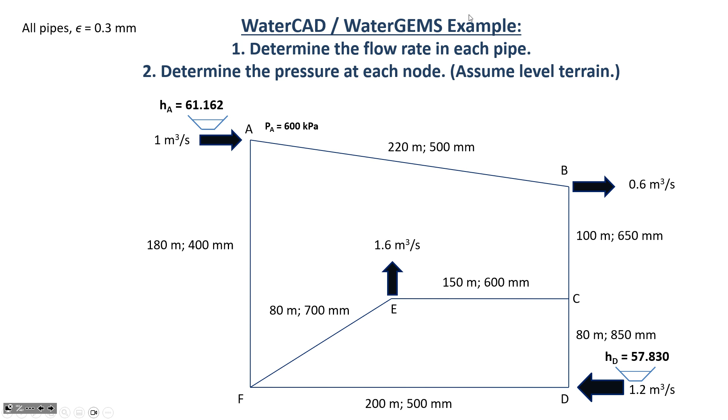So I just wanted to point that out. Okay, so what we're going to do is, first of all, you have to have CONNECTION Client running in order to get the program to work. And so this is just an annoying little license activation tool that resides down here in the system tray. And I'm going to make sure that I'm logged in. See, IW, that's me. So I'm logged in.

And with that connected, now I can just... WaterGEMS is the one that I want. And it's going to feel familiar to you if you've used any kind of CAD program. You know, it's drawing lines. We're not using any of the integration for AutoCAD or MicroStation. We're just going to do the standalone version of WaterGEMS. It's simpler. We don't need the extra functionality of integrating.

So create a new hydraulic model. So it's this one in the middle. Create new hydraulic model. It'll take a moment to initialize. If it's your first time using the program, it's probably going to default into British gravitational units. So what we'll have to do is switch it into SI and then restart the program. So go here to Tools. So we're on the Tools menu option. It brings up an option-specific ribbon, and then under More, select Options.

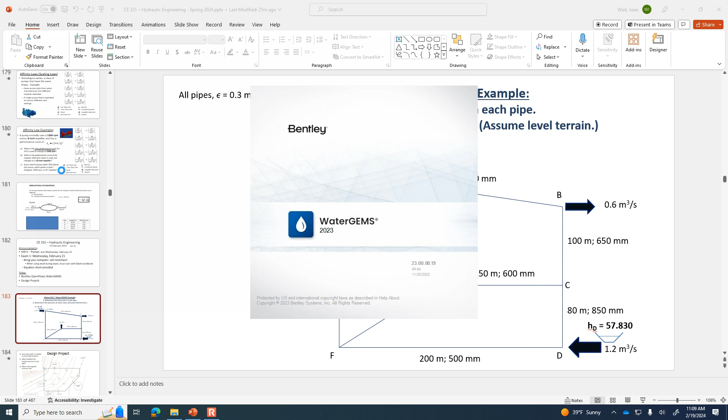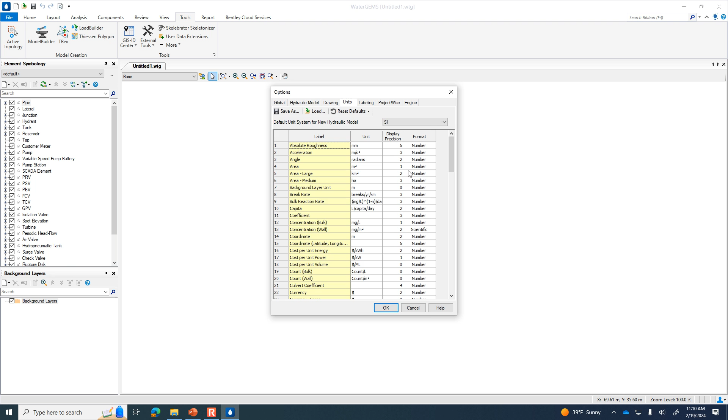But when we restart it next time, it will remember that in the previous example we had SI. And the reason why you have to restart is even if you set SI units, about half the time it won't remember that. I don't know why. It just kind of is a little bit laggard in switching over the units. And so we start from scratch, and we're going to verify that this time it's in SI. So if we go to Tools, More, Options, Units, SI. Okay, so we're good there. So here on your handout, put switch options to SI and check.

Do you have to restart it for SI units? No, it's not like you're going to have to restart every time. It's just that way every time you get back on there, it'll have the SI units now. Yeah, check if it's got the SI, and if it does, you're golden. If it's there from the beginning, we don't have to restart another time.

All right, so the next kind of preliminary thing before anything else is let's tell the program we want maximum accuracy, and that means Darcy-Weisbach. Because for whatever reason, I don't understand it, they have the model set to Hazen-Williams. We know that Darcy-Weisbach's more accurate, and I don't care if it takes the computer 9/10 of a second instead of 4/10 of a second to calculate the flow rates.

So I'm going to go under Home, Options, Base Calculation Options under the Steady State Solver. So just double click on this first place where it says Base Calculation Options. And then see where it says Friction Method Hazen-Williams? Let's change that to Darcy-Weisbach for maximum accuracy. Okay, we close it, double check if it's there. Yep, Darcy-Weisbach. Okay, so the preliminaries are out of the way. We've got the SI units and the maximum accuracy friction method. So we can begin drawing.

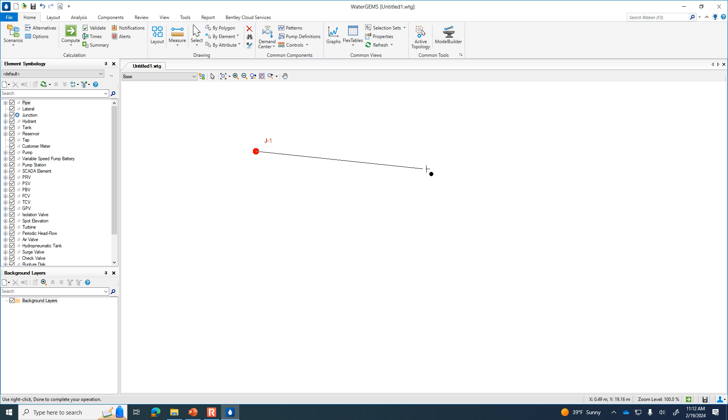So I'm going to click, that's pipe junction A. Right now it's calling it J1. I'll go in and rename it later. Here is B, C, D, F, E.

I'm going to connect back to this one, which is junction C, and I've got to click right on it because I don't want to draw another junction. I want to snap to the existing one that's there. Okay, now I need to press escape to cancel this next pipe that it's drawing, because my last step is to connect what it's calling J1 and J5, which I know as A and F. So escape, and then connect the two by just clicking on J5 and J1.

All right. So it doesn't matter that those lines aren't perfectly vertical and whatnot, because this is a top view, and the orientation of the pipe doesn't change the hydraulics. It's just a matter of the length, the flow rate, the friction type, and so on.

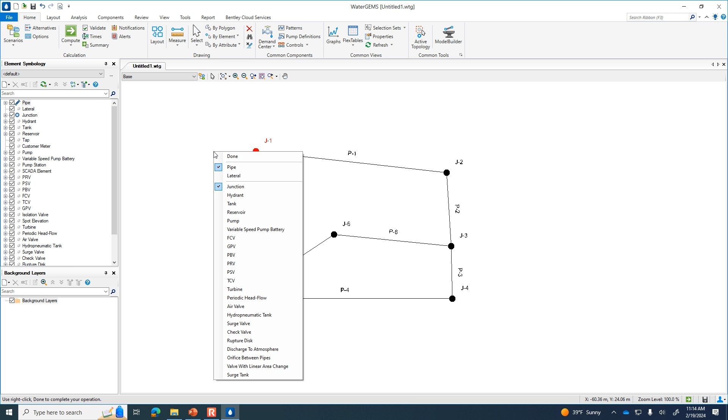Okay, now I want to put in those two reservoirs. So if you right-click on your mouse, see, this is the list of options, and right now we're on junction. Switch to reservoir. So you right-click to get that menu up, then left-click on reservoir, and then just drop a reservoir close to J1. Okay, so that's calling it reservoir 1. Now look, my cursor is a reservoir, so I need to switch it back to junction again. Junction, and then tie it into J1.

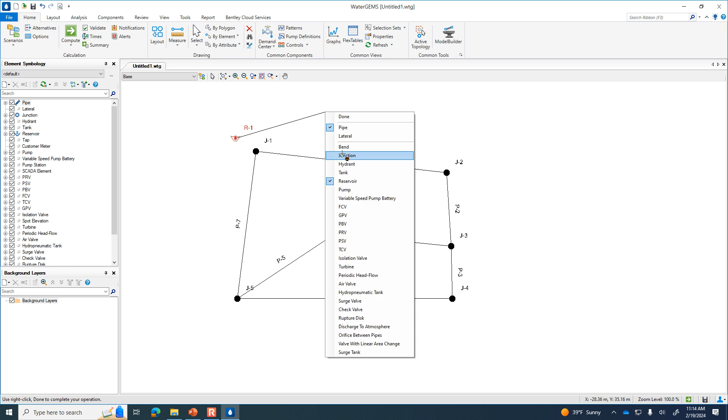So let me show that same process again over here at D, at what it's calling J4. So right-click to get the reservoir, drop a reservoir in the proximity of junction D, and then right-click again to get it back to junction, and connect the dots.

Okay, so now I have a model. I've got the schematic of our system. I haven't yet told it the diameters or lengths. I haven't yet told it the elevation of the junctions or the elevation of the water. All of those things I'm going to define. So any questions so far? Does anybody need to see a certain thing?

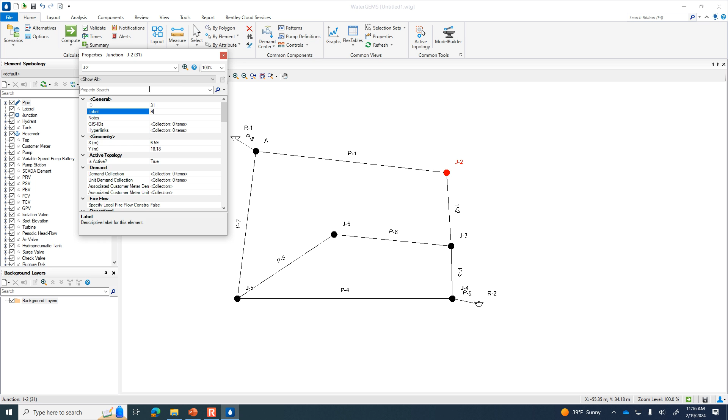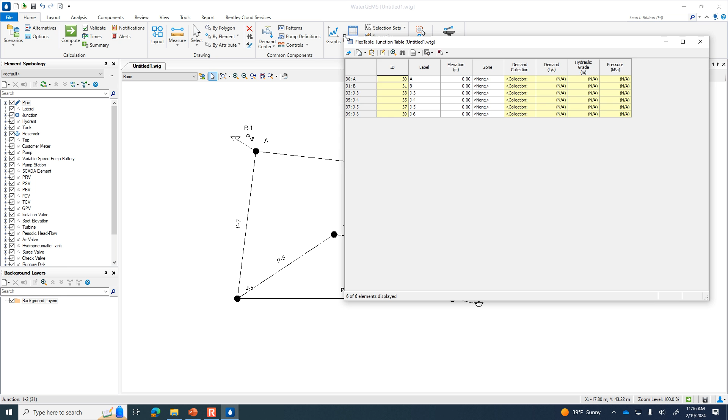So a better way to do it is to open the flex tables. Here on the home menu, in the ribbon across the top, one of the options is flex tables. Click on the little arrow beneath flex tables, and we're going to open up the junction flex table. When the junction flex table is visible, we can just go through one at a time without having to open a menu for each one to relabel them. So J3, that's C. J4, that's D. J5, that's F. And J6 is E.

All right. Now look what else it knows about these locations. It says elevation, zone. You're not going to do anything about zone, but elevation is the physical elevation of that junction. For our example, we assume that all of these are at the same elevation, and let's just say that's the elevation datum of 0.

In your project, I'm going to give you a map of a city, and it's got elevation contour lines. So you're going to have to actually put the physical elevation of the ground, or maybe ground minus 1 meter. It doesn't matter, but you're going to have a different elevation for every point in the network for the project. For this example, we'll leave it at 0. All right, so let's close this.

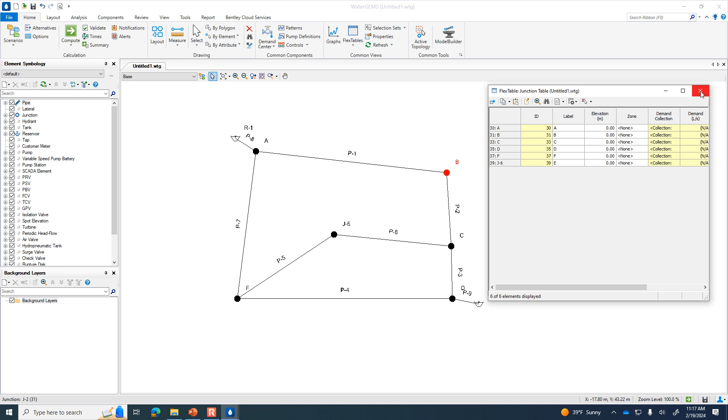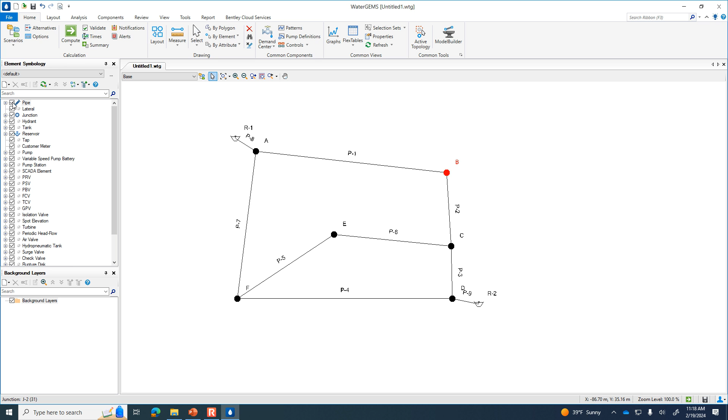We've renamed it. I don't necessarily need to see the pipe names, P1, P2, and so on. So let me point you over to the left here. These are the annotations, and see where it says pipe. Right now the pipe name annotation is selected. It's got a checkbox, but if I turn it off, oh no, those are the pipes. We need those.

Label, it's the label. So expand it, and turn off the label, because I'll just call it pipe AB. I'll name the pipe by its origin and destination junction. So you can turn off the annotations using these menus. All right.

On the subject of annotation, let's add some annotations like the diameter of the pipe and the flow rate that's going through it. Okay, so you know how I just turned off the labels? We can add more annotations. Right-click on the word pipe and then do New Annotation.

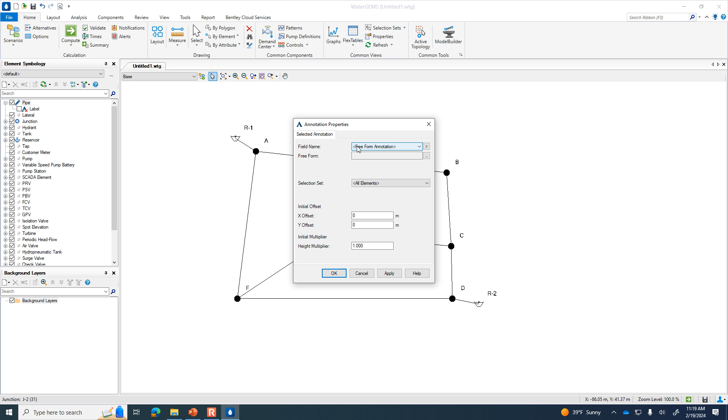And here in the drop-down box where it says Field Name, drop down to Diameter. And rather than just have the numerical diameter, like if you clicked Apply, it just shows the diameter and it's on top of the pipe. We'll fix that. I think it's better if we have a label. So under prefix, I'm going to have D space equals space, and now apply. And now it says D equals 152.4 millimeters. So that's a little bit better.

Now to get it up off of the line, I'm going to do a Y offset. So see where it says initial offset? We can manually drag each one of these annotations one at a time. But if we just want all of them to be up off the line a little bit, let me do a 2-meter offset. So I've just put 2 into the Y offset and then apply. And now they're not on top of the line, and so that looks a little bit better.

You'll notice down here there's a height multiplier. What if for some reason the labels are really small? Usually that happens when I've zoomed out a lot and started drawing my network zoomed out. Now the labels are small. You can change the size of the annotations with this height multiplier. You can make them bigger or smaller, however you like. In this case, a multiplier of 1 looks good to me. Okay. So we've annotated the diameter.

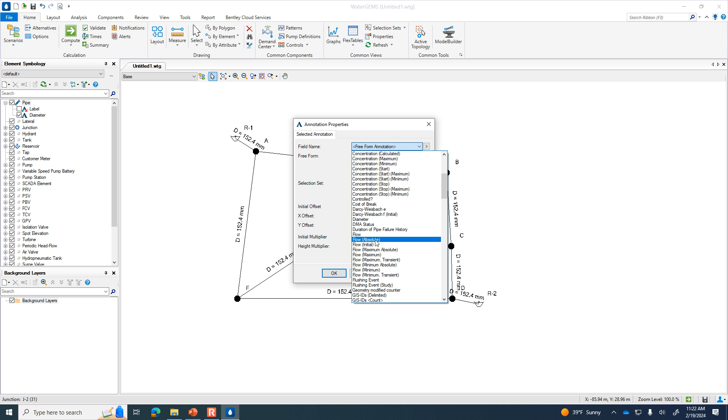So the flow rate I want to do is flow absolute. And the reason why I want flow absolute instead of flow is, you remember how clockwise is positive, counterclockwise is negative from the Hardy-Cross method that we did on Excel? It will give you negative flow rates if the water direction is counterclockwise. And it looks weird if you have negative flow rates. So we'll just annotate flow absolute. And then under the prefix, I'll do Q space equals space. And then the Y offset, I'll do -2 so that it's below the line.

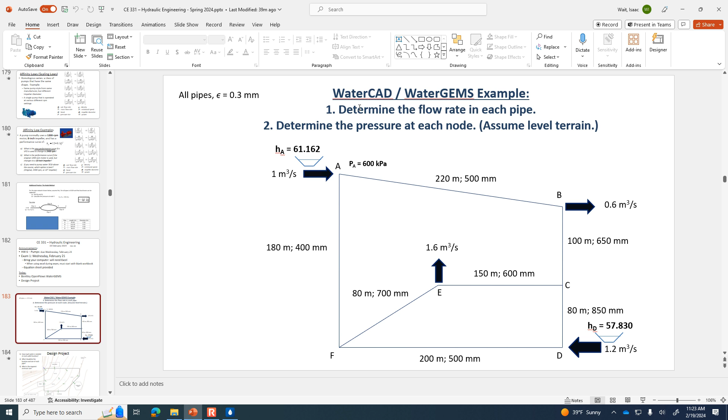And let's also annotate the pressure at the junction, because if we go back to the example, what is it asking? Flow rate in each pipe, pressure at each node. All right, so let me now right-click on the word junction, because we're going to add a junction annotation, which is the pressure. So right-click, new, annotation, scroll down on the field name, and we want pressure. And then for prefix, I'll just have P space equals space.

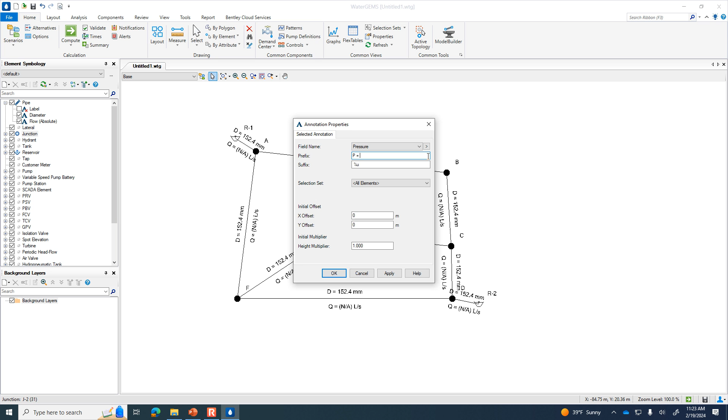And then I'm going to need an offset. And this is hard to predict in advance. Let's see what -1, -1 looks like. It's probably going to be in the way. Apply. Yeah, it's definitely in the way. Let's do -3, -3.

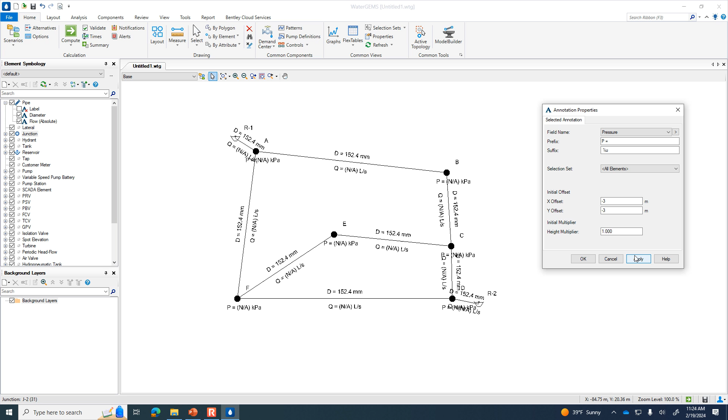That seems all right. I may go back and change some of them, drag them out of the way. For example, here at D, it's a little bit crowded. So let me click OK, and then at D, I can drag that one down a little bit, so it's not quite in the way like it was, and maybe move this one over.

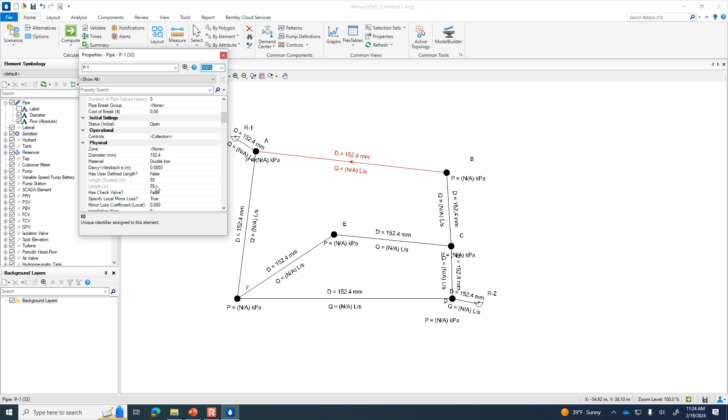So we've annotated. Now we need to put in the pipe details. Let's take pipe AB. Double click on pipe AB to bring up its properties. Right now, how long does it think that pipe is? It thinks that pipe is 55 meters. Why does it think that? It's just based on where I clicked on the screen.

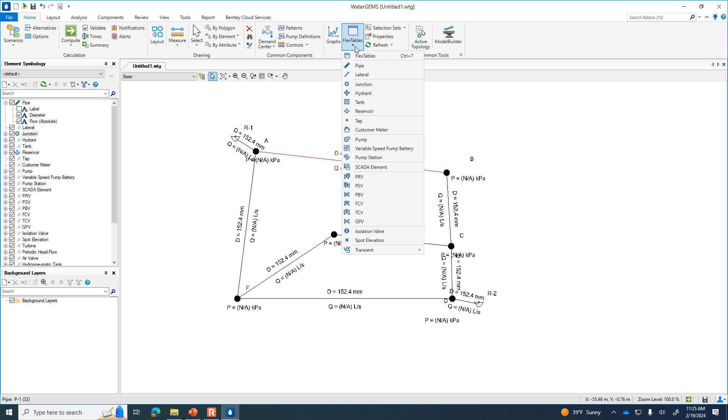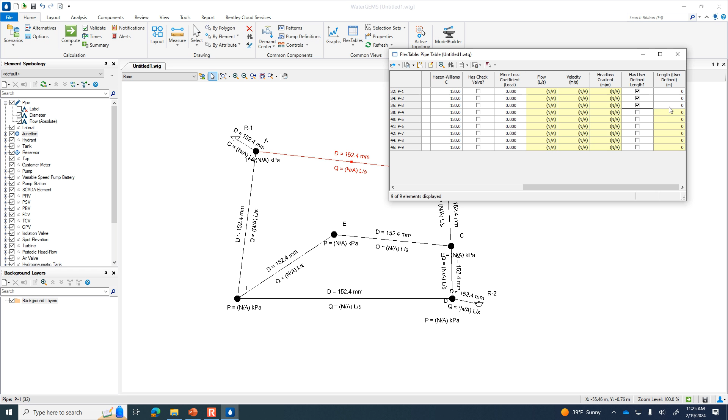How long is that pipe supposed to be in our example? 220. So there's a way for me to tell it it's a user-defined length, instead of just using where I clicked, and type that in manually. Go to the FlexTable for the pipes, scroll to the side, and one option is 'has user-defined length.' Let's click the checkbox for each of those. Notice when you click the box, it turns this last one from yellow to white. Yellow means it's a calculated, non-editable field, but white means you can directly put data in.

So when I click this, it lets me put in the lengths they're supposed to be. For this first pipe, I guess I need to rename the pipes. Under the labels, let's call the pipes based on their start and stop nodes. So P1 is AB, P2 is BC, and so on. The ones that connect to the reservoir, I'll just leave as they are.

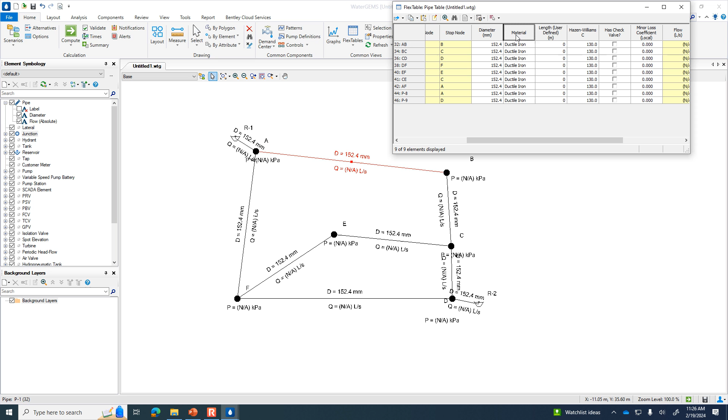Here's the diameter, and over here is the length. Let me make those two columns closer together by dragging. If you click with the left mouse cursor and drag, you can move where things appear. I want to move the length next to the diameter so I have an easier time changing both. All right, so you've got the printed handout.

Let's look at AB. It should be 220 meters and 500 millimeters in diameter. Let me put the length first and then the diameter, since that's how it's annotated on the handout. So the user-defined length for AB is 220, and the diameter is 500. BC is 100 and 650. CD is 80 and 850.

DF is 200, 500. EF is 80 and 700. CE is 150 — the length is 150, and the diameter is 600. AF, the length is 180, the diameter is 400.

For these other pipes, I want as little head loss as possible through the pipes that connect to the reservoir, for this example. In your project it's a different story, but the purpose of the reservoirs here is just to pressurize the junction. So let me make it relatively short — say 10 meters long — and give it a really large diameter, 1,000 millimeters, so there won't be any head loss through that little pipe connecting the reservoir to the network.

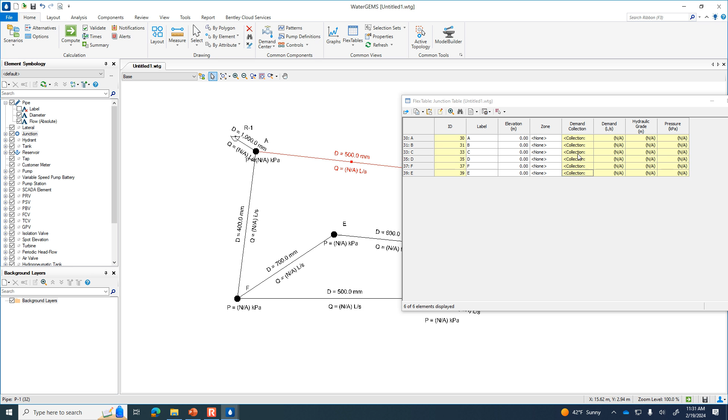Okay, so we just defined it at B, and then the other one we want to do is E. So do a demand collection, click on the ellipsis at E, and it is 1,600 liters per second at that location. All right, let me just make sure that it's got the one at B. Yeah, it's there—600 and 1,600. Okay, we are set to calculate.

Now, you'll notice it didn't tell us the pressures or flow rates yet—it hasn't done any calculations. We have to click on a compute button for it to run the model and go through the process. In the background, it's doing what we set up in the spreadsheet, same method. It's looking for balancing continuity at each junction and making it so the head loss is the same regardless of which route you take between junctions. So here we have an indeterminate system where the water could be coming from A towards E, either through this upper section or through this lower section.

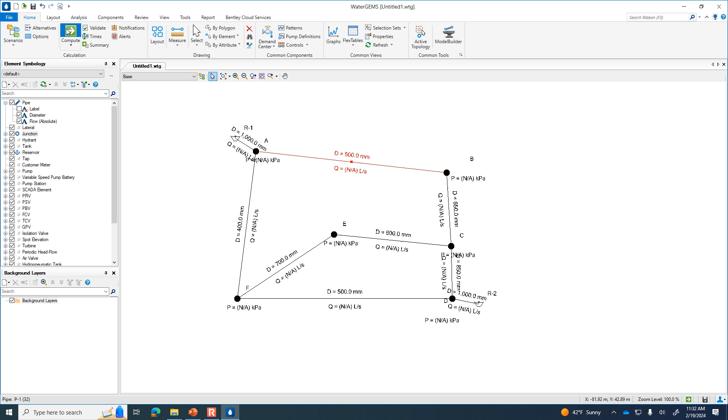It'll go through the same process that we did once I click on compute. So let's do that—it should only take a moment once we click it. It's pretty quick, and this is the result.

Green is good. If you had pipe diameters that were too small so that it's calculating negative pressure at junctions, you may get an error message or a red icon or a yellow icon if there are warnings or a critical warning. This summary will give you an idea if something's wrong—like if the pipe diameters were too small and the water couldn't flow as needed, it would give you an error message telling you to make the pipes bigger than they were before.

But let's just see what the flow rates are. So it's told us the pressure at junctions. Oh, there's something I didn't do.

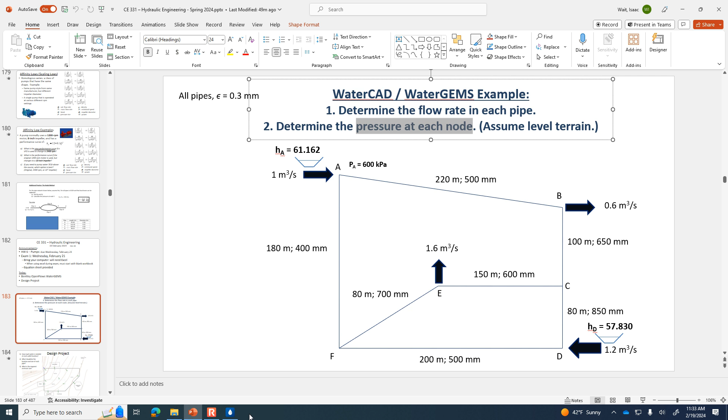I didn't define the water surface elevation at the reservoirs. I'm surprised it didn't catch this—well, we do have negative pressures. See that? Look at junction E—the pressure is negative 24 kilopascals. And the pressure at A is saying 0 kilopascals. The example is supposed to have 600 at A. So I need to define the water elevation in the reservoir. I forgot—let's do it now.

So go into the FlexTable for the reservoir. Reservoir 1 is the reservoir where the elevation of the water should be 61.162. Reservoir 2 is the reservoir where the water surface elevation should be 57.83.

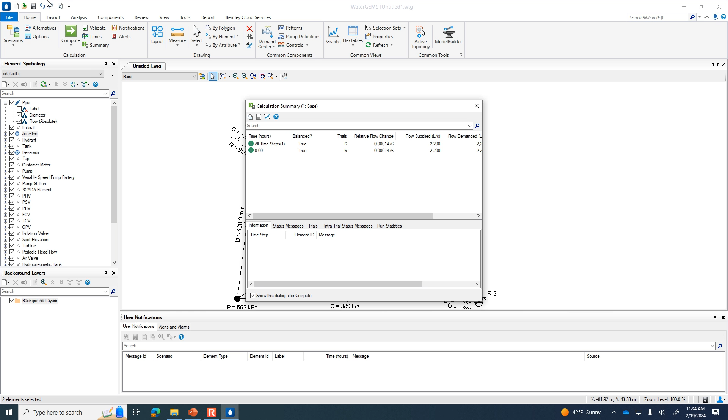All right, now with that, I'm surprised it didn't give us the error before, because obviously we don't want negative pressures. We'll compute again. And just that easily, now we've got updated pressures and flow rates. Pretty good, right? Pretty good.

Let me see—I don't know if I have the solution to that example we worked before. I'm not sure whether I've got it handy just to compare. That was the Hardy Cross. Oh, I think I've just got the blank student start at the ready.

Well, we need to save the time anyway to talk about the project. But all right, now let me show you the real power of this program. For you, what you're doing is not just analysis—this is analysis, we're taking the given diameters, the given lengths, and we're saying what the pressure is. That's analysis. The next step, which is a step above analysis, is design and optimization.

What if the rule was your pressure can only go as low as 240 kilopascals? What if that was the allowable minimum? We've made the pipes bigger than they need to be. If the allowable minimum is 240, we're leaving money on the table—we're wasting money because we bought pipes that were too big. So let's try and optimize this network.

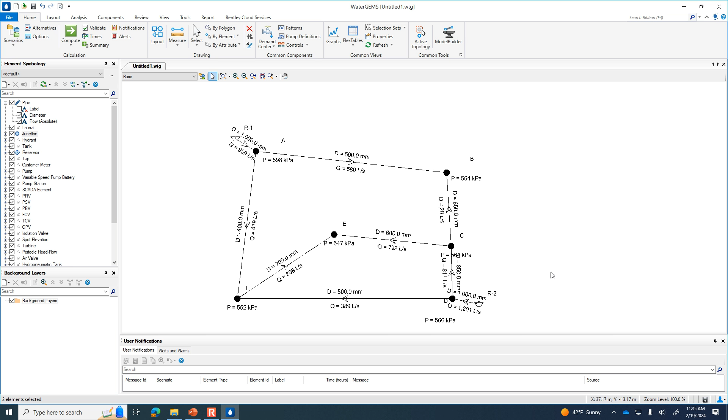For example, what happens everywhere in the network if we just change pipe AB? Right now, pipe AB is 500 millimeters. What if I bought a cheaper pipe—what if I bought the 400 millimeter pipe? Okay, so now look, right now the pressure at B is 564.

When I change that to 400 millimeters, it doesn't change it yet. I have to compute again, but I've changed the diameter of pipe AB, and it's going to go from 564 down to 562. We only lost 2 kilopascals at junction B, and we saved the client a lot of money by going from a 500 millimeter pipe to a 400 millimeter pipe.

So optimization is make a tweak here, make a tweak there, keep lowering the pipe sizes until you're barely meeting the required minimum. The required minimum is what's allowable, and you only barely have to meet it.

So what's the biggest pipe in this network? Besides these reservoir connecting ones, it's this pipe that's 850. So where is that? What pipe is 850? Okay, it's CD. Pipe CD is wildly oversized.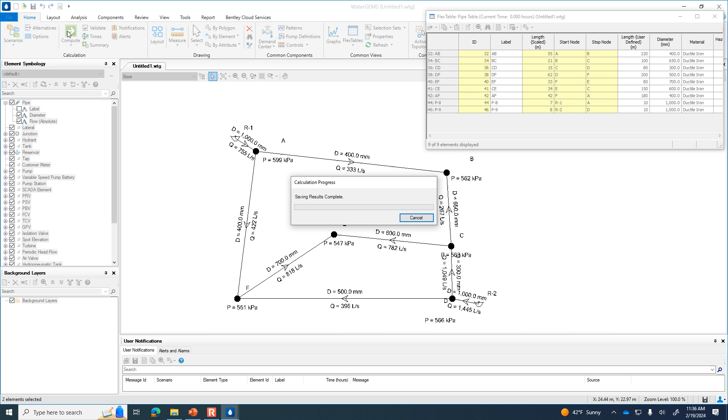What happens? Am I above the minimum if I change it from 850 down to 300? And I'll calculate again. Yeah, I'm going to get away with it, no problem. Everywhere is still above the minimum of 240. So I just saved tens of thousands of dollars with that one optimization.

So that's what you're going to be doing in the project when you get to phase 2. In phase 2, you're going to break out WaterGEMS and begin drawing your network and optimizing it.

Okay, so before we talk about the project, are there any questions in how you've used the program WaterGEMS today?

I would love it if you stop by my office and, if you've got questions, we can go through it together. Of course, the video's online, so you need to be this proficient at WaterGEMS to do the project. You don't need anything beyond what I've just demonstrated.

For the project. So let's talk about the project then. Let me bring this up on screen and give you a couple of handouts here.

By the way, you should put WaterGEMS on your resume after phase 2 of the project. You should list it as a software package that you're familiar with, because you'll know it well enough to hit the ground running if you go to a firm where they use it. You won't be as good as the guys who do the design on it, but you'll be able to open a design.

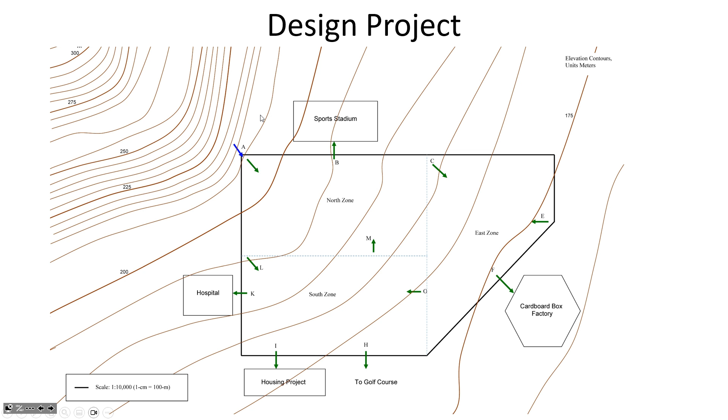So you'll find out how many liters per person per day. You'll know how many people are there. And so you'll say how many liters per day are they using in the north zone. You'll do an analysis to figure out how much water do they need at the football stadium. That's not going to be necessarily based on liters per day. We'll talk about the sports stadium in a minute, but the point is you have to figure out how much water is coming out of the network at each of those green arrows, just like we did in this example.

What do you tell WaterGEMS? You tell it where the water is coming out. And then how big the pipe should be depends on the allowable pressures and the flow demands. So you'll be doing that same process in this project. You'll be answering how much water is needed at each of the locations where there's a green arrow, how big should the pipes be, and what location should the pipes be. By the way, this black line is not the pipe. This black line is the city limits.

So what's the most efficient route to get water from K to I? So here's the city limits. What's the most efficient way to get water from K to I? A straight line, right? So you wouldn't want the pipe to go along here and then there because it's too long. So part of what you're doing is optimizing the size of the pipes, and part of what you're doing is optimizing the location of the pipes.

So for example, is it better to have water going from A to L and then to M? Or is it better to have the water go from A to L and from A to M and from A to B? Like, what's going to minimize the overall length of pipe? So it's an optimization exercise in that regard as well. You'll also be sizing a reservoir. We'll talk more about the reservoir in a future class. That's the third phase of the project.

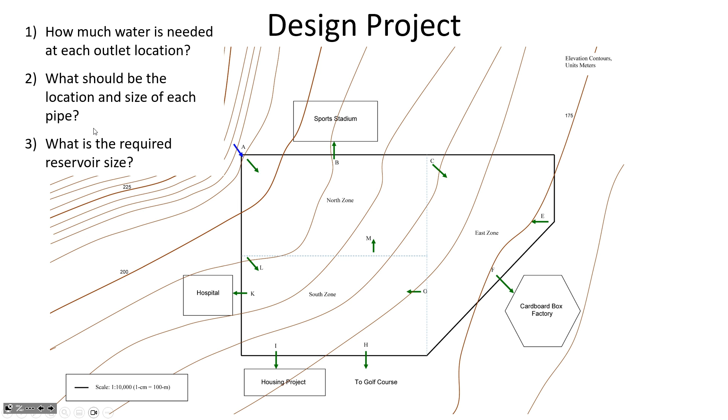So here's an example of the demand estimation data that I've given you on that last page. I'm telling you how much water is needed for fire, how many guests are at the hotel, how much water they need at the food processing plant, the number of stores in the mall, number of seats in the football stadium, and so on. How do you think they use water at the football stadium? Like, what are some of the ways that water gets used at a football stadium? Bathrooms. They water the grass.

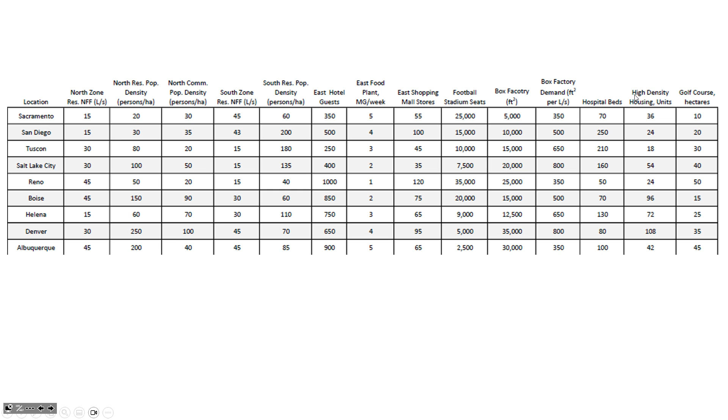Of the two, what do you think has a bigger flow demand? Watering 100 yards by, what's the width of a football field, like 40? It's a little bit of grass. Or like 35,000 people using the toilets all at halftime. It's that. It's the toilet use, and maybe also the water fountain or washing down vomit or whatever. So you need to figure out how they are using water at all of these different places, so read the handout and that'll help you. One of the things is the average daily use, 220 liters per person per day.

You don't use water at a constant rate through the whole day. There are certain times of the day where you use a lot of water and certain times of the day where you're not using any. And on a population basis where you get tens of thousands of people together, some people are night owls, some people work during the day, and on average, this is what the temporal distribution of water use looks like.

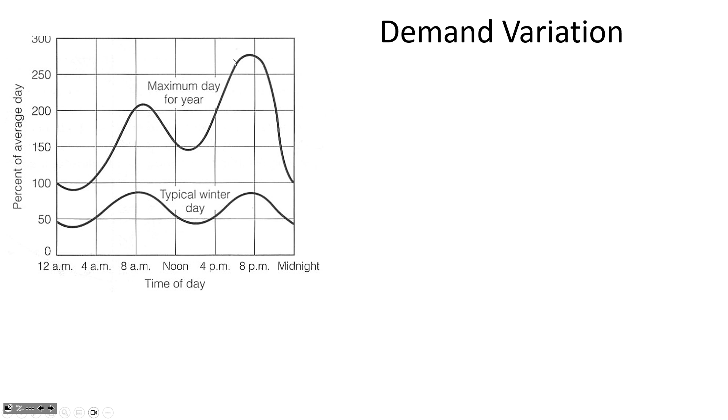You know, on the maximum day where it's really hot and maybe they're irrigating the yard, if it's a dry climate, and people are washing their dishes and so on, the peak flow is typically in the evening. And the factor that you should use is the worst case scenario for designing your network. What's the worst case scenario in the residential area? It's either going to be the maximum daily flow rate plus fire demands, or the maximum hourly flow rate.

And so the peaking factors are 1.8 to find the maximum daily flow rate from the average daily flow rate, and 3.25 is the peaking rate. You multiply the average daily flow rate in liters per second by 3.25, and that tells you the maximum hourly demand for a residential area.

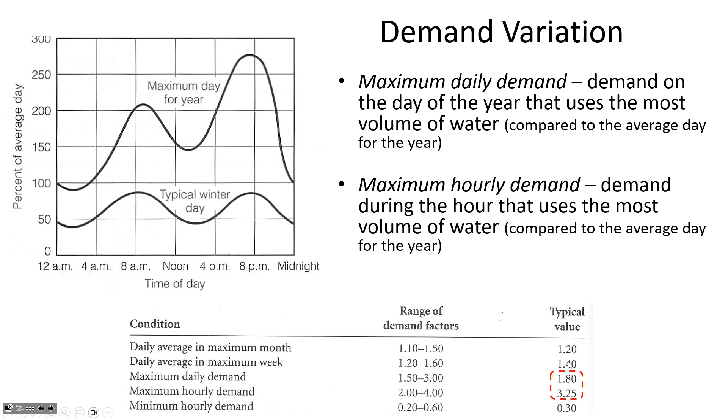Not all flows are peaked, though, and this demand forecasting summary table is what you're going to submit on Monday, March 6th. You're going to submit this, a bunch of supporting hand calculations, and a brief write-up, like a typed summary of what are your data sources, what are your assumptions, what was your thought process, so that I understand how you came up with the demand estimation for your city.

Now, the structure of this summary table has also evolved over the years to reflect what data you need to provide. So residential demand, you'll notice it's got the average daily flow rate, the peak day, peak hour, peak day plus fire, and then the design flow would be the largest of the peak hour or peak day plus fire, plus the commercial peak hour.

You'll notice that intentionally, there's no cell here. It's because commercial demands aren't peaked for fire flows. They have sprinklers in commercial buildings, and so we don't have to add extra flow capacity in the pipe above and beyond in the same way that we do for residential structures. So just be aware that the structure of this summary table is intentional.

I've got a copy of that for you. Maybe grab it on your way out because we're running really low on time. I've got one more minute before we run out of time. That summary table is also in Blackboard.

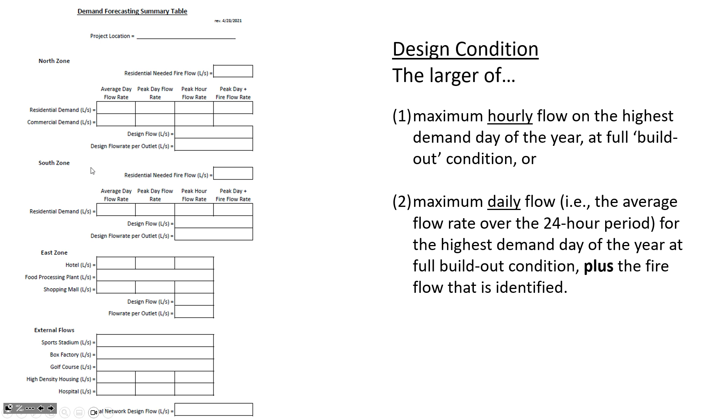Here are a few hints. This is definitely worth the 1 minute. They don't water the grass 24/7 at a golf course. Seems obvious, right? Why wouldn't they water the grass 24/7? Because people are out there golfing, and they're not spraying the golfers as they're golfing. Why does this matter? Because you have to determine how big should the pipe be to the golf course. So the grass needs a certain amount of water, and you're not going to consume that water over 24/7. You're going to consume that water over a fewer number of hours per week than all the time.

Okay? Football fans are in the stadium about 4 hours on game day. They're not there for 24 hours. And so you'll calculate how much water do they use at the football stadium during a football game. You'll think, well, the average person's going to go to the toilet twice, and then I also want to give some water for something else. You'll figure out how much water they use at the stadium. Don't divide that water use over 24 hours because it's not. It's used over a concentrated period.

Same thing about a food processing plant. Think about how much is it going to be open. Something that's like just a factory, maybe it's open 24/7 and they're using a certain amount of water over a big number of hours per week. But conservative means be careful. What if they're only open 40 hours a week and they're using a certain amount of water over less hours? Then that makes the flow rate higher because Q is volume divided by time. And so if time is fewer hours, then the flow rate is going to be larger.